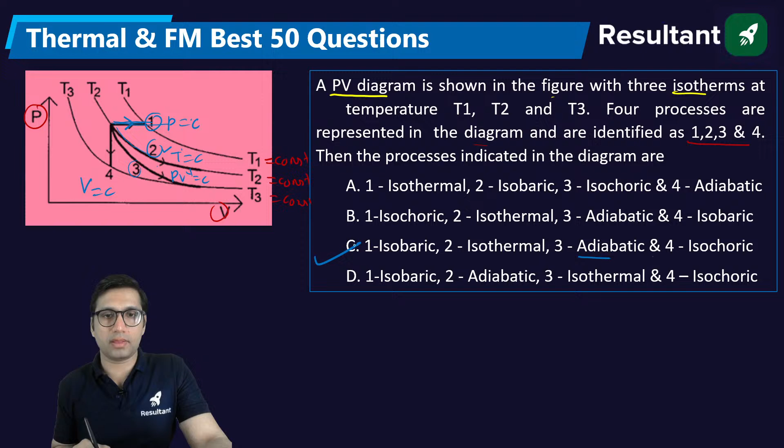Very good, Neeraj. Your answer is absolutely correct.

Consider the following statement: for a given compression ratio, the Otto cycle is more efficient than the diesel cycle. For an Otto cycle, an increase in the compression ratio leads to an increase in the mean effective pressure, but a decrease in the thermal efficiency.

Yes, everyone. I know that today the number of students is less. It was expected that before Diwali, some of the students will be celebrating Diwali with their family members. So at this time, the live students in the class may be less. But I believe that if you are preparing for the RRB JE and SSC JE exam and really want to crack the exam this year, then you should watch this session either live or recorded, because I'm taking this session only for the students who are actually preparing for these examinations.

This statement, for a given compression ratio, Otto cycle is more efficient. Yes, 100%, this is correct. For an Otto cycle, increase in compression ratio leads to increase in mean effective pressure, but decrease in efficiency. Now, this statement is wrong, because for the Otto cycle, the efficiency depends on compression ratio. It is 1 minus...

Hello Geet, how are you dear? Meeting you after a very long time.

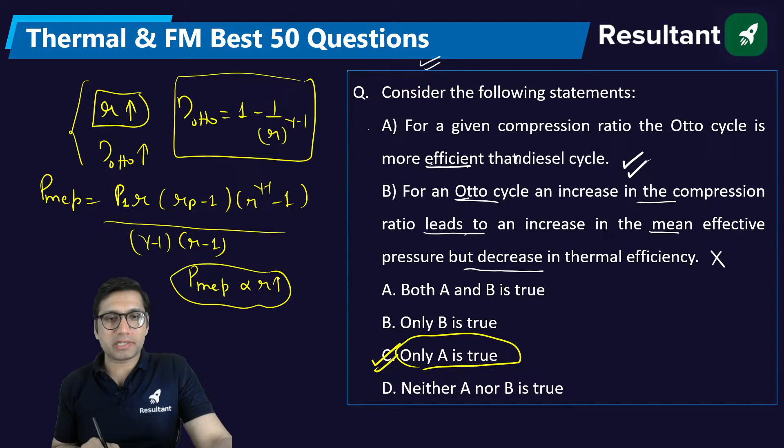So you can see from here that mean effective pressure is also directly proportional to the compression ratio. So if compression ratio increases, mean effective pressure of the Otto cycle will also increase.

Next question. An IC engine has a brake power of 720 kilowatt with a fuel whose calorific value is 32 megajoule per kg. The engine is expected to consume 60 gram per second of fuel. Calculate the brake thermal efficiency of the engine. A numerical based question. When you're preparing for the CBT2 exam, it is expected that you will see some numerical based questions also, right?

So my dear, in this question, they are asking the brake thermal efficiency. What is the formula for brake thermal efficiency? It is brake power to the mass of the fuel into calorific value of the fuel. ठीक है? This is the formula.

State के एग्जाम देने हैं सर, ITI group instruction like and all. Okay. Good, Geet, good. You are from Himachal Pradesh? HP? Yeah, it's a beautiful place also. You can definitely try for state exam. You should try. And if you get selected, getting your job in such places is really nice. Just a second.

Yeah. So brake power is given as 720 kilowatt, or you can say 720 into 10 power 3 watt in terms of watt, or you can say kilowatt only, but this is in megajoule. So if you put this in 720 kilowatt, this should be in kg per second. So how you will find by kg? You divide by 1000 and into,

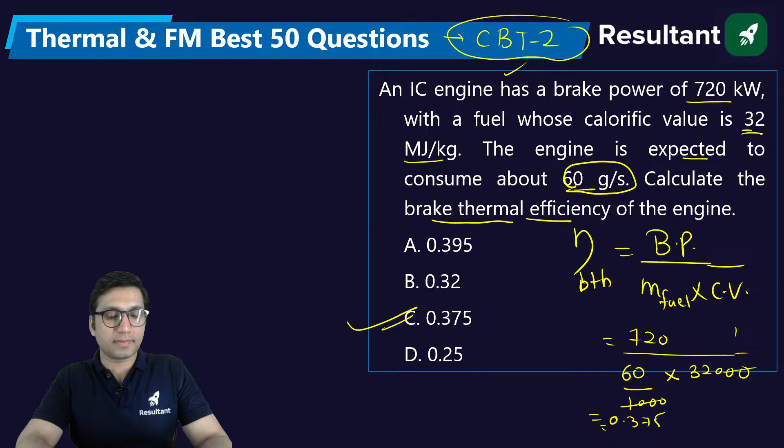Okay. So efficiency will be 3.75. I think 37.5 it should be there. Just a second. Okay, it's 720. Yeah. So it will be 0.375. Okay, option C. Are you all getting this answer? क्या आप सबका ये आंसर आ रहा है? The second law of efficiency of a process defined as C.

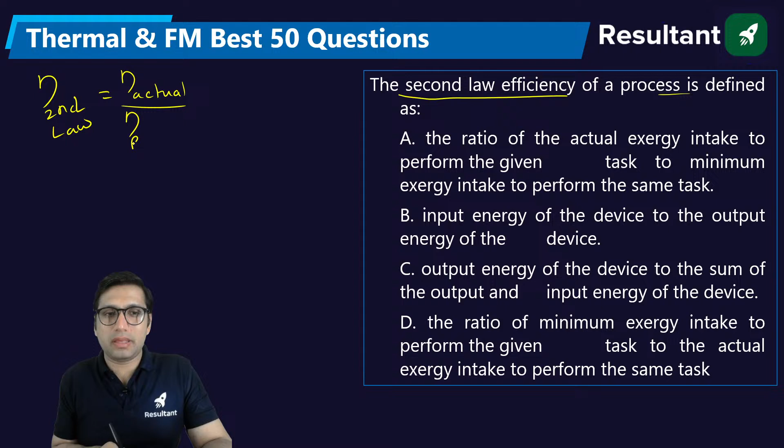The second law of efficiency is defined as, see, if you really see the formula of second law of efficiency, it is equal to the actual efficiency to the reversible efficiency. Or you can say that it is actually the ratio of actual work output to the maximum work output that you get from the reversible engine. Now this is the formula with respect to work producing devices. Okay, now you can also write the second law efficiency.

आप second law efficiency को, रिश्तेदारों की क्या सुनना, आप देखिए, it's a very simple concept, that you should be only focused on what your parents, your mother and father tells you. Okay, अगर आपके माता पिता आपके लिए क्या कहते हैं वो आपको सोचना चाहिए, रिश्तेदार क्या कहते हैं इससे आपको फर्क नहीं पड़ना चाहिए, राइट? एंड सबसे इंपॉर्टेंट है आप क्या सोचते हैं, राइट?

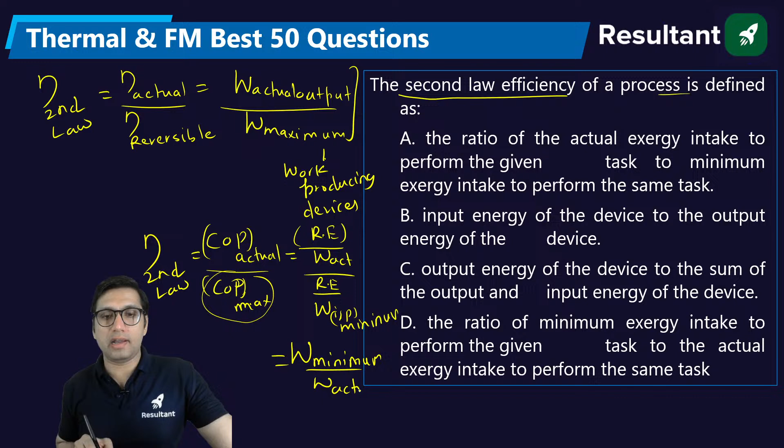So it is refrigeration effect divided by actual work to the refrigeration effect divided by minimum work. The COP will be maximum when the work input is minimum. Okay. So the formula of second law efficiency will be minimum work to the actual work, in terms of work absorbing devices.

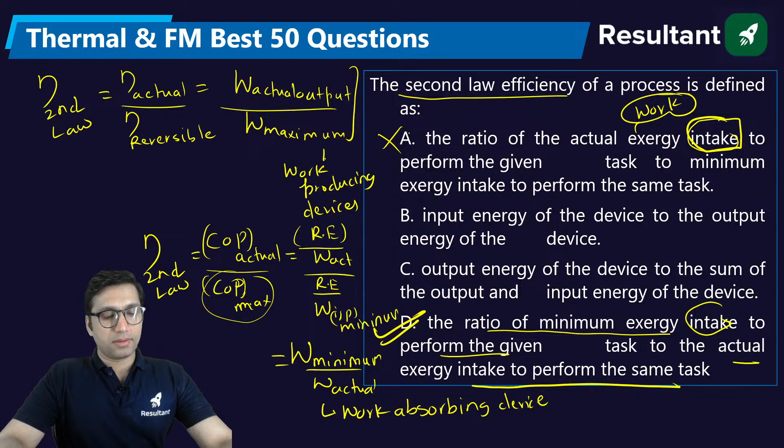A reversible engine is operating with temperature limits of 800 Kelvin and 300 Kelvin. If it takes 560 kilojoule of heat, then unavailable work should be?

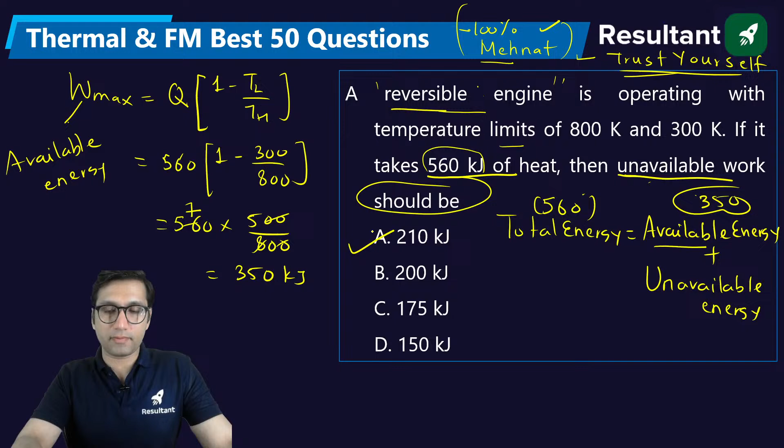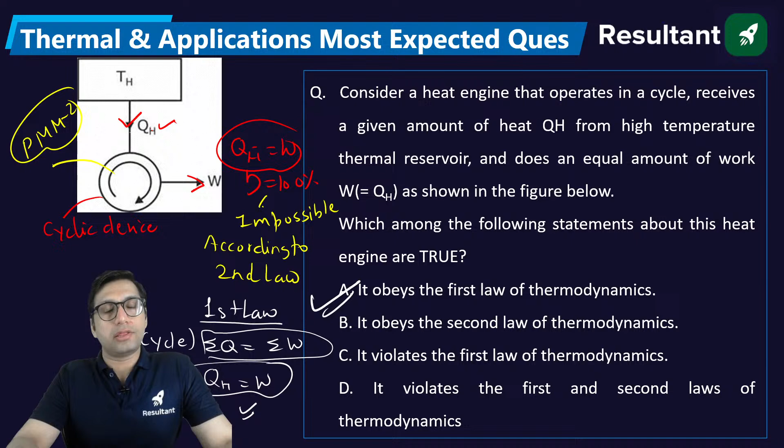The device given in the picture here is obeying the first law of thermodynamics but not obeying the second law of thermodynamics. See, this is a match the following type question. List 1 में कुछ चीजें दे रखी like most efficient working fluid, detonation and octane rating. In list 2 they are mentioning polyatomic gas, monoatomic gas, auto ignition and knock resistance.

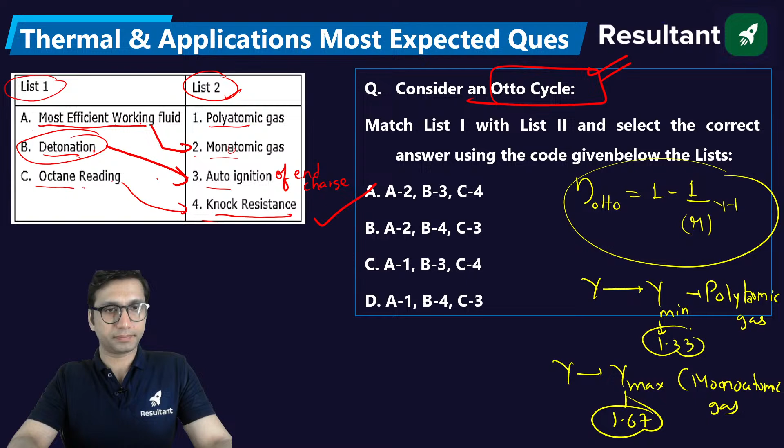Next question. Which is the process in the Miller cycle that follows reversible constant volume process, next to constant volume process?

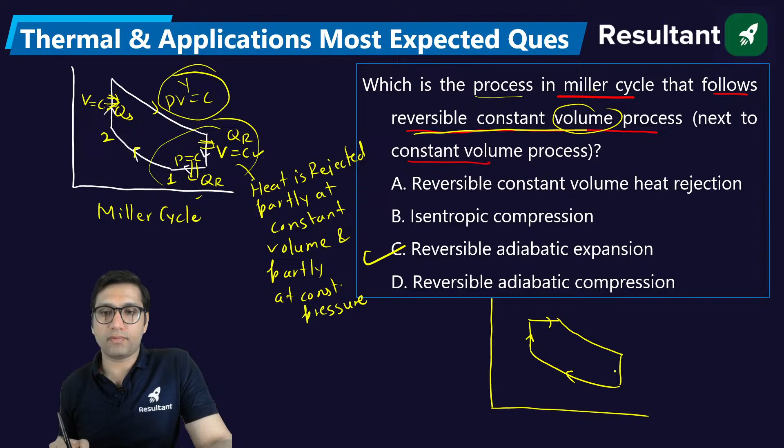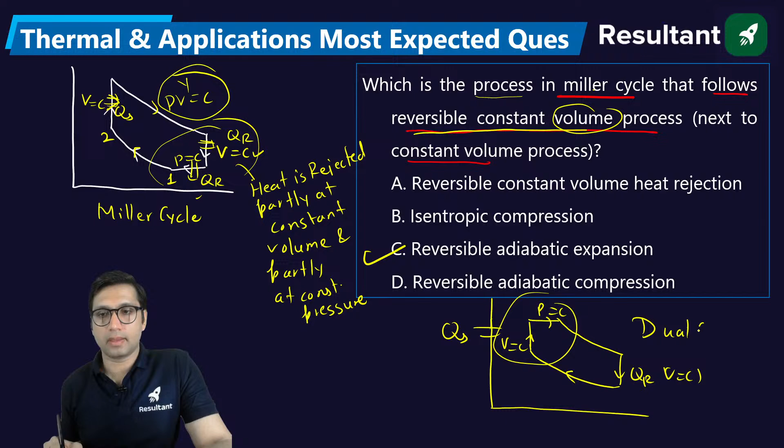Okay. So Miller cycle समझ में आ गई। In Miller cycle, the heat is supplied firstly at constant volume, but heat rejection takes place both at constant volume and constant pressure. थोड़ा सा dual cycle जैसा ही लगता है। In dual cycle, heat is supplied at constant volume and constant pressure, and then heat is rejected at constant volume. Okay, this is dual cycle. This is Miller cycle. Understood?

Next, what is defined as the amount of heat absorbed by 1 kg of water at saturation temperature for a given pressure to convert completely into 1 kg of steam at the same temperature? इस हीट को हम क्या बोलते हैं? What is this heat defined as?

See, first of all, we are saying that the water is at saturation temperature. When the water is at saturation temperature at a given pressure, this water is called as saturated liquid.

जब कोई भी पानी अपने saturation temperature पे पहुंच जाता है, then that water is called saturated liquid or saturated water. And when it reaches this temperature, we only provide one heat, that is your latent heat. Latent heat is provided to change its phase at constant pressure and constant temperature, from saturated liquid to saturated vapor.

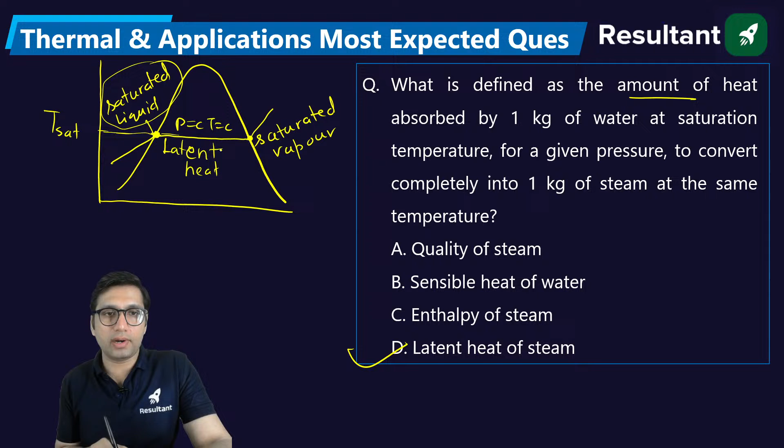Okay, some of you are saying open. Why will it be open? Why should its impeller be open? What will happen? What is the advantage of having an open impeller? So if the

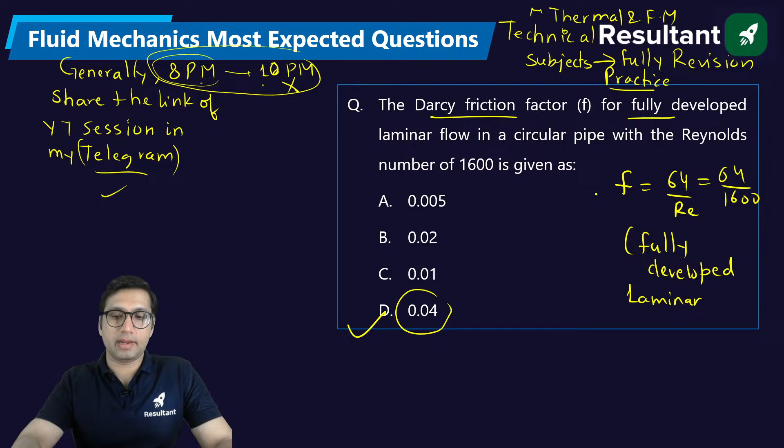64 by 1600, solve it, you will get the answer. Yes, what's the value you are getting? So you will get 0.04. Next question: laminar developed flow at an average velocity of 5 meter per second occurs in a pipe of 10 centimeter radius. The velocity at 5 centimeter radius is?

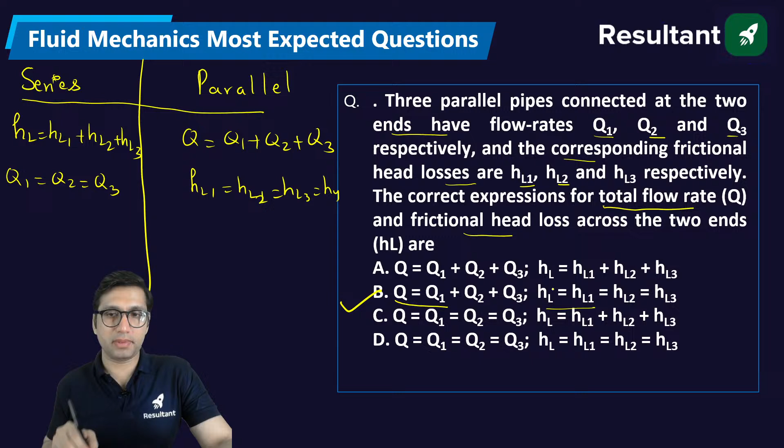Displacement thickness is 4 mm, energy thickness is 3 mm, momentum thickness is 2 mm. Shape factor you have to find. Shape factor, it tells us about how much velocity profile is distorted. Shape factor tells how distorted the velocity profile is.

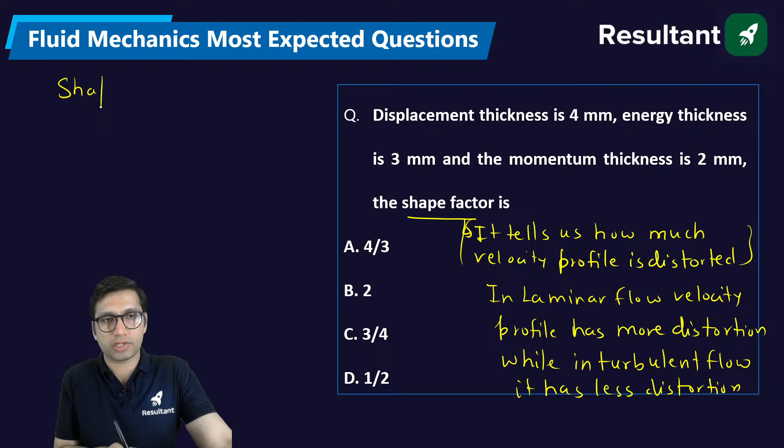Distortion means, like in laminar flow, velocity profile has more distortion, or distortion means variation we can say, while in turbulent flow it has less distortion. This means the shape factor is the ratio of displacement thickness, with context of boundary layer, displacement thickness to the momentum thickness. Okay, it is their ratio.

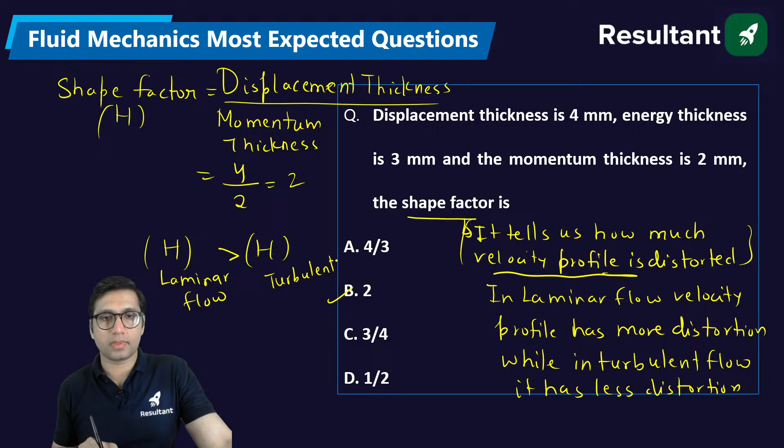Okay, next question. For a laminar flow through a circular pipe, the value of friction coefficient in Darcy-Weisbach equation is 0.02. The Reynolds number for the flow. Quickly, come on guys, let's increase the speed little bit. See, here it says friction coefficient. Friction coefficient means fanning factor.

And you should know that friction factor जो होता है हमारा, that is equal to 4 times of friction coefficient और fanning factor. Okay, इसको आप fanning factor भी कहते हैं. तो friction factor is 4 times of that.

Now according to Darcy-Weisbach equation and for laminar flow through a circular pipe, the friction coefficient is 16 by Reynolds number. If this is given as 0.02, 16 by Reynolds number, so Reynolds number will be equal to 16 by 0.02. Okay, so इसको solve करेंगे तो 800 आपका आ जाएगा वैल्यू.

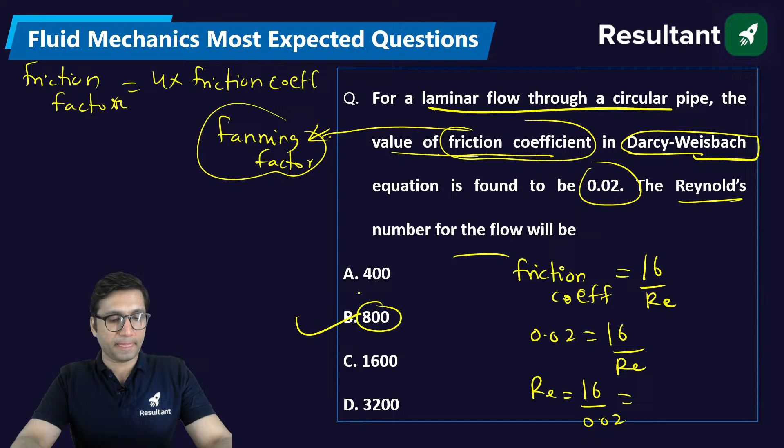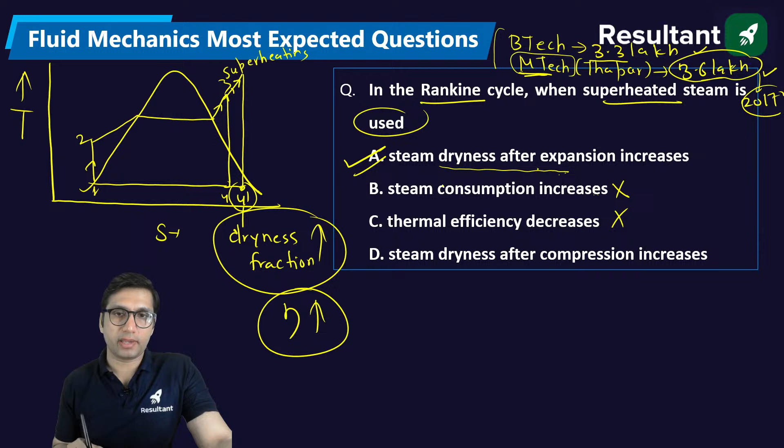You are having a government job, Renault. If you are talking about NHPC, that means you are having government job. Government job है आपके पास. If you are having government job, then why you have to leave it? That too for MTech. There is no point. MTech करने से कोई खास एडवांटेज नहीं मिलता आपको, मैं बता देता हूँ.

An oil separator is located in the... Oil separator कहाँ पे लगता है?

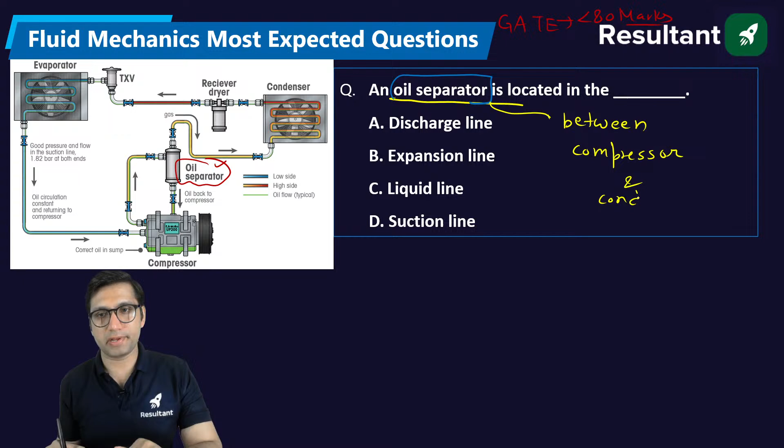कंप्रेशर का मतलब क्या है, कंप्रेशर के बाद और कंडेंसर के बीच में, what is this, we have a discharge line. Okay, after compressor we have discharge, so we have discharge line. Okay, so कहाँ पे लगाया जाता है ऑयल सेपरेटर, in the discharge line. Option A.

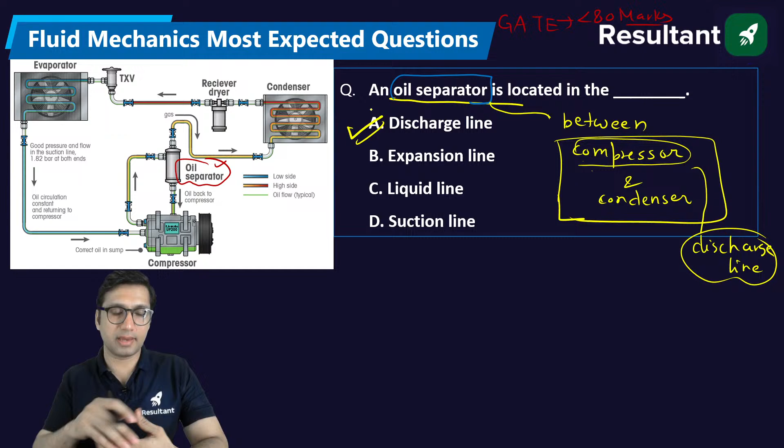If u and v component of velocity in the x and y direction are u is equal to ay and v is equal to bx plus cy, then flow exists when. When we say flow exists, what is the meaning of this thing? Flow exists when continuity equation is satisfied.

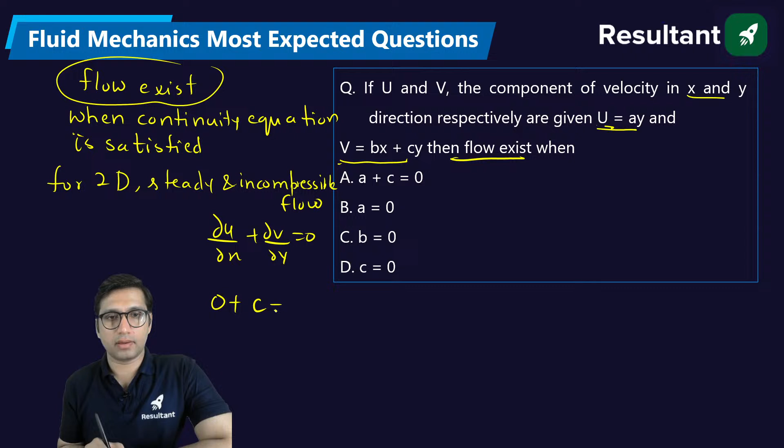And what is continuity equation? For a two-dimensional, steady and incompressible flow, the continuity equation is del u by del x plus del v by del y equal to 0. ये है continuity equation. आपको u दे रखा है, del u by del x, आप del v by del y निकालेंगे. Okay, so del u by del x will be 0, del v by del y will be c, c will be 0. This is the result you get.

Option D. Okay. Velocity potential function or potential function only exist when the flow is. देखिए, velocity potential function which is a scalar function of space and time. Velocity potential function is scalar function denoted by phi. It is scalar function of space and time.

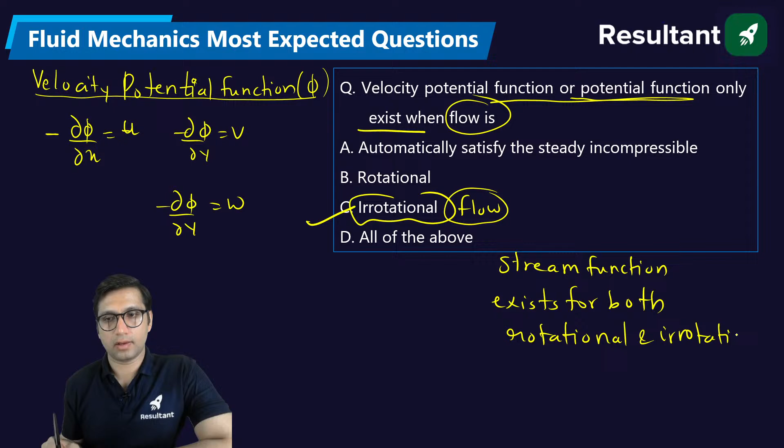But Renault, I think you should not just simply ask me and, okay, Vikas Sir has said MTech nahi karna and we don't have to do MTech. You need to firstly tell me honestly why you want to do the MTech. You feel like that in that NHPC, in that organization, all your colleagues are getting good quick promotion because they have higher degree. Is it like that? NHPC में तो ऐसे भी स्टूडेंट्स होते हैं जो जेई करके बनते हैं. अगर आपको लगता है कि you are not standing out in front of the other people, let me tell you that if you have a government job, आपको promotion मिलेगा. Okay, you will definitely get promotion after a particular year of experience.

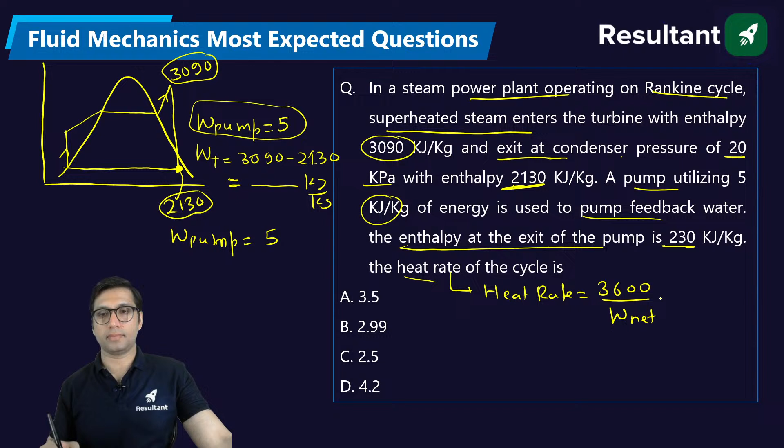So you will get turbine work from here in kilojoule per kg. The pump work is given to you. Okay, 5. Now question is, what is heat rate? Heat rate is 3600 divided by net work. This is a formula for the heat rate. Sorry. 3600 by net work into heat supplied. This is a formula. Or it is equal to 3600 by efficiency.

So heat supply you have to find. Now for heat supply you need to find this enthalpy H2. Now enthalpy at the exit of the pump is given, 230. This is given. So you can simply say 3600 into 3090 minus 230 will give you heat supplied, divided by net work, which is turbine work 3090 minus 2130 minus pump work which is 5. You will get the answer.